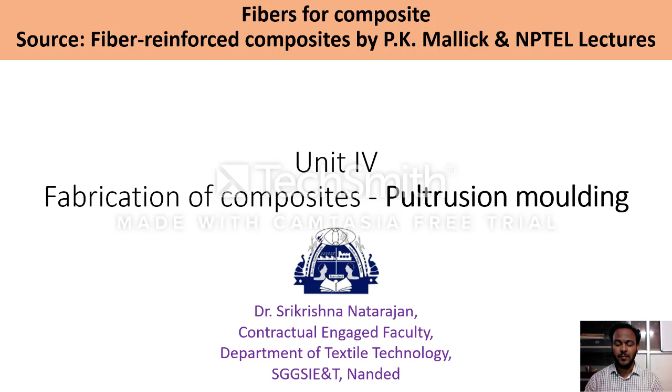We will be continuing with unit 4, which is the fabrication of composites. The topic of today's discussion is pultrusion molding. And before going into pultrusion molding, we will just see a small glimpse of the previous lecture.

In our previous lecture, I have spoken about the blow molding process, the working principle, process parameters involved, advantages and disadvantages, and then applications. Blow molding is a manufacturing process of composites to make hollow plastic parts, in which you will blow the plastic until it occupies the shape of the mold to get the desired shape.

You will use the parison. The first process is the making of a parison. You will make the parison and then fit it in the mold, and then you will start injecting the air with high pressure so that the bottle will get expanded because of the heat and the pressure, and it will occupy the shape of the mold.

There are various process parameters that are involved, like melting temperature, cooling time, etc., and you will make the product. There are some advantages and disadvantages also associated with this process. It's a simple process which involves less tooling cost, and it is used for making hollow parts especially. But there are some disadvantages also with this process. You cannot make lengthy parts or thick parts.

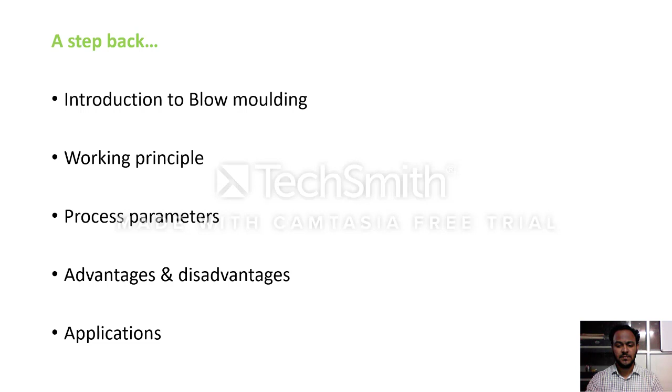Coming to the introduction on pultrusion molding, pultrusion molding was developed around 1950 for making fishing rods of glass fiber reinforced polymer. This is basically the historical perspective of how the process first came into being. It was developed around 1950 for making fishing rods.

Pultrusion is an automated continuous molding process for producing long straight structural members of constant or uniform cross-sectional area. If you want to produce long straight structural members, then the only molding process that you can use is pultrusion molding. The major constituent in a pultruded product is longitudinally oriented continuous strand rovings.

When it comes to the manufacture of composites, the broad principle is you will use a fiber and you will use a matrix, and mixing both will lead to the formation of a composite. Fiber is the reinforcement phase and matrix is the bulk phase, which is used for giving support to the fibers. So here the major constituent in the pultruded product is the longitudinally oriented continuous strand rovings. So that is the reinforcement phase.

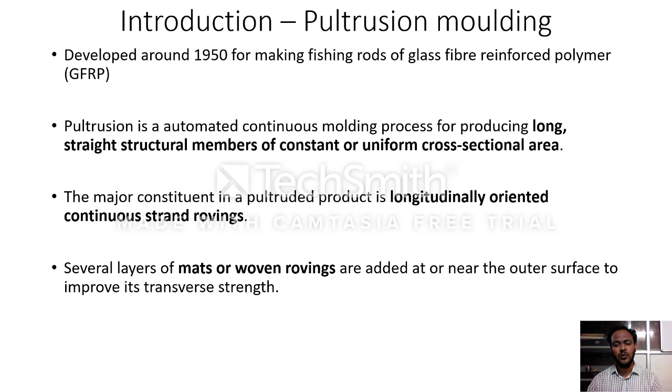Several layers of mats or woven rovings are added near the outer surface to improve its transverse strength. You need not use only rovings; you can use mats or woven rovings also for this pultrusion molding process, which we will see.

What is the working principle of this process? The name itself implies it: pultrusion combines the words pull and extrusion. If you exclude the word pull, then it is only the extrusion process. Extrusion is like the normal melt spinning process which you have learned in polyester manufacturing.

If you remember, in polyester manufacturing, you take the pellets of the polymer and heat them in an extruder, like a screw extruder, which will start pushing the polymer melt. Because of the heat the pellets get melted and are pushed towards the exit of the die, and when the melt exits the die, you get the filaments. But when it comes to the pultrusion process, it is the opposite of that, which we will see.

So pultrusion is the pulling of materials such as fiberglass and resin through a shaped and heated die. The basic mechanism of a pultrusion system is the same as that of the metal extrusion process, but there is a difference. The only difference is that in the extrusion process, the material is pushed through the die.

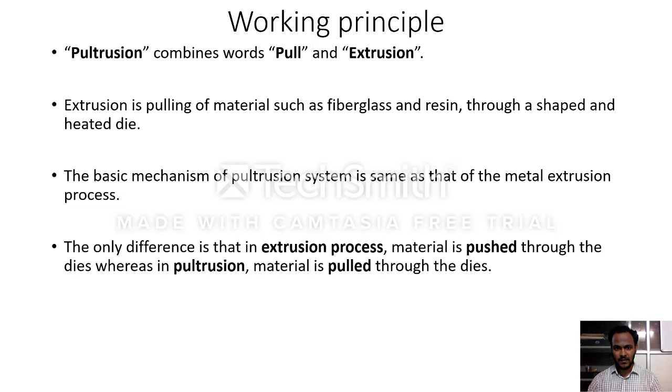What are the raw materials used for this process? The raw materials, when it comes to the reinforcement phase, you see the reinforcement type here is E-glass, S-glass, carbon fibers or graphite fibers also you can use, aramid fibers you can use, and the material form, you can use materials in the form of a roving, mat or in the fabric form. But all should be in a continuous form and not in the short fiber form.

And what about the matrix? The matrix that is used is polyesters, phenolics, vinyl esters, and then epoxy resins. When you see all these matrices, you can understand one thing. All these matrices belong to the thermosetting polymers. Since we need to produce a rigid type of product from this process, we are using thermosetting plastics or the thermosetting matrix.

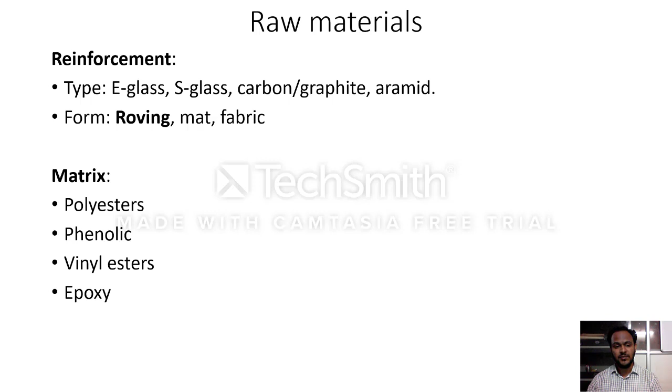Now coming down to the process, before going into the process, we will first see what are the steps that are followed during the pultrusion molding process. First step is the reinforcement handling system, which is the creel. Reinforcement handling system is nothing but the fiber handling system. That is the material which is in the form of a reinforced phase. Next step is the resin impregnation station, where the matrix is present.

Third one is the material forming area, where the product is formed. And fourth one is the components that heat and consolidate. Once you have made the material, you have to heat and consolidate the material. That is the fourth step. And fifth step is you have to pull the pultruded product. As the name itself implies, pultrusion. So you are going to pull the product instead of pushing it, which you do in the extrusion process. And equipment to cut the pultruded product, which is the culmination of the process, where you will cut the product to the required size.

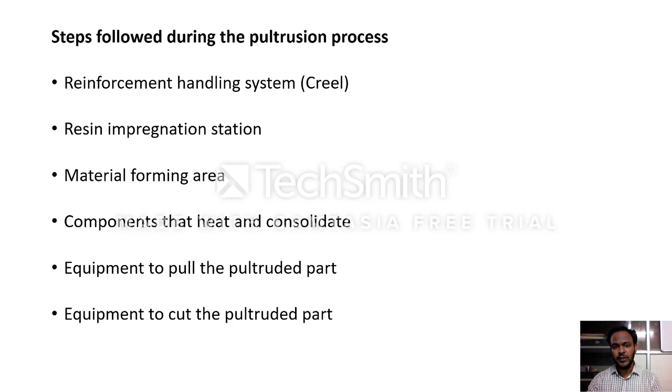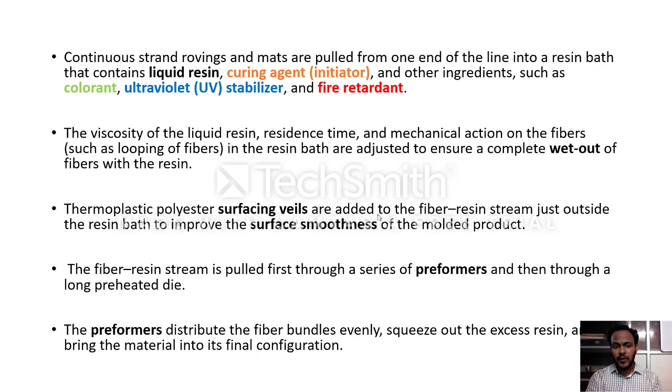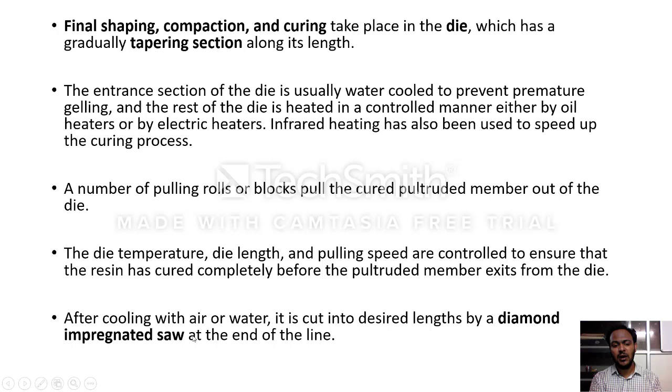So here you can see the pulling system, which is the caterpillar pullers or reciprocating pullers. A number of pulling rolls or blocks pull the cured pultruded member out of the die. This we have already seen. After cooling with air or water, it is cut into desired lengths by a diamond impregnated saw at the end of the line. This is the diamond impregnated cutoff saw, which will cut the composite. That is the final profile or the final product that is made. This pulling system will pull the product.

This is the line diagram which you can see. There are the creels. From the creels, through the guide plate, it moves to the resin bath, and there is a surfacing veil and preformers. These are a series of preformers, and this is the forming and curing chamber. Then these are the pull blocks, like caterpillar or reciprocating blocks. Then finally you have the cutoff saw. This is the line diagram.

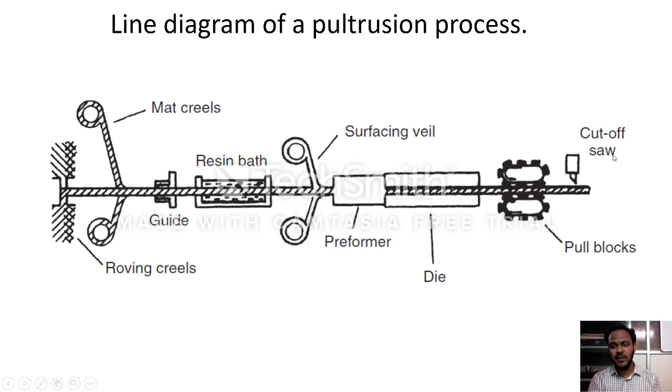Now I will show you a small video in which you can very clearly understand how the process happens exactly. This video is from Strongwell.

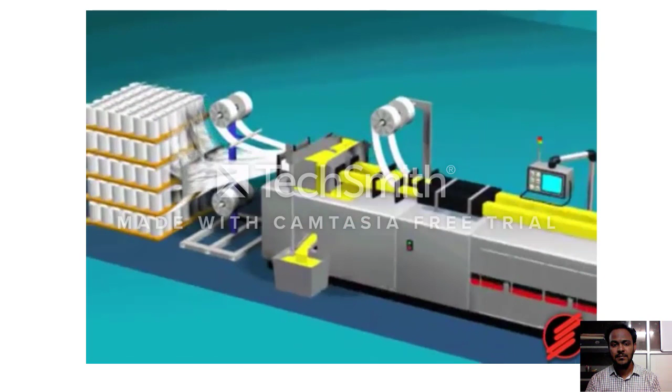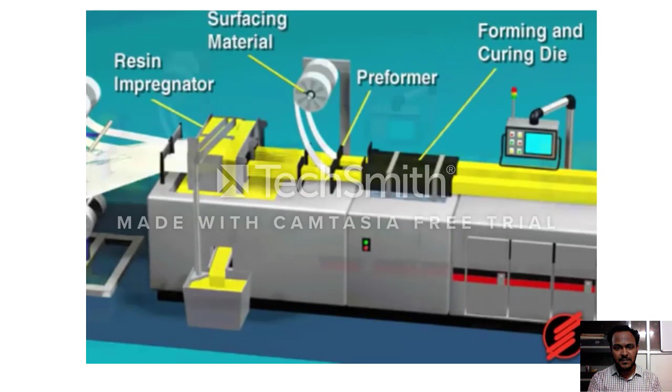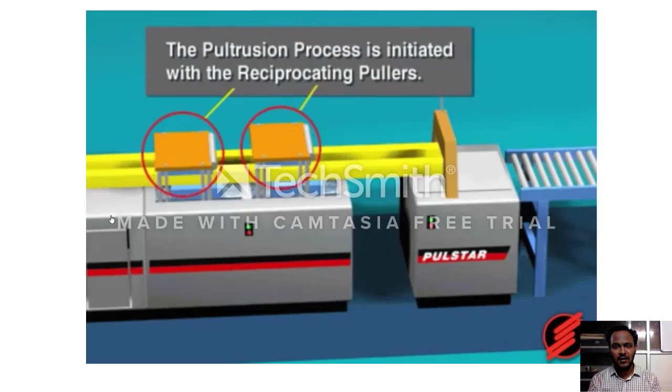You can see this is the place where the fiberglass rovings are there. So the continuous stranded mats to the resin impregnator, surfacing material, preformer, these are the reciprocating type of a pulling system, cutoff saw. Here the pultrusion process is initiated with the pullers, reciprocating pullers.

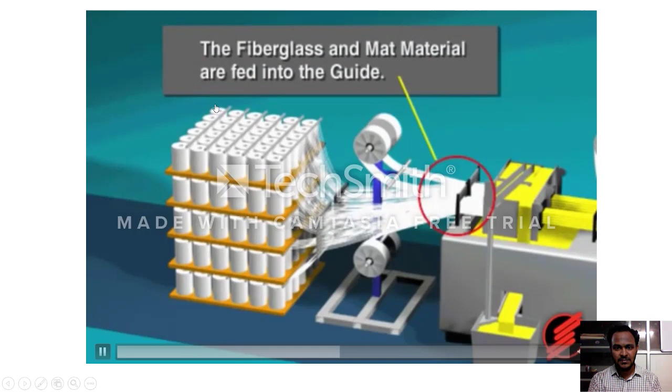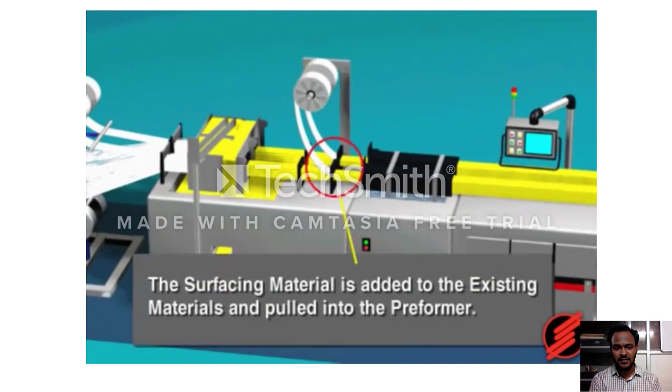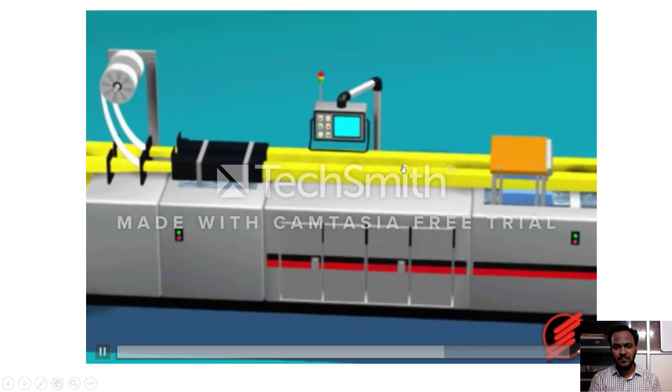This is how the strand mats are fed here. Then here the impregnation takes place with the resin tank, and the surfacing material is added to the existing materials, and then it is pulled into a preformer, and this is the curing chamber. And here this one we have already seen the reciprocator,

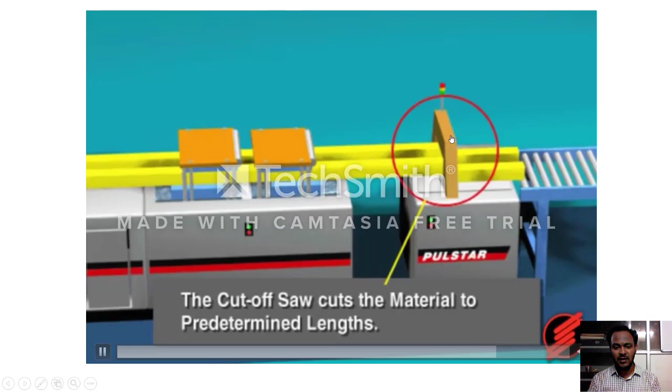and this is the cutting saw, which is a diamond cutting saw to cut the product into predetermined lengths. You can see how it is cut finally. So coming down to the further discussion, we will see what are the advantages and disadvantages.

This is a low cost automated system where human involvement is least, which produces high quality products. So it is a low cost automated system where the human involvement is very least. Once the rovings are kept and the program is fed, then it will automatically keep running. Near net shape can be produced. So this is one of the great advantages in this pultrusion molding process where the near net shape is produced.

I hope you all may be remembering this word called near net shape, which I have already taught you during the class in the advantages of composites. You can go through that. Near net shape means the exact shape whichever is required that you can make it. So whatever fibers or matrices that you have added for manufacturing this pultruded member, that will get almost utilized for making the final product. So you will get the exact shape that is expected.

Next advantage is the surface finish of the product is high as compared to the other composite processing methods. The surface finishing is very good in this process. Can fabricate extremely large parts and any transportable lengthy parts. The production rate is high as it is a continuous production process. If you want to make large and lengthy parts, that may not be possible with blow molding or hand layup molding, which you have learned previously, but it is mainly possible in the pultrusion molding. So that is a great advantage, and the production rate is very high as it is a continuous production process.

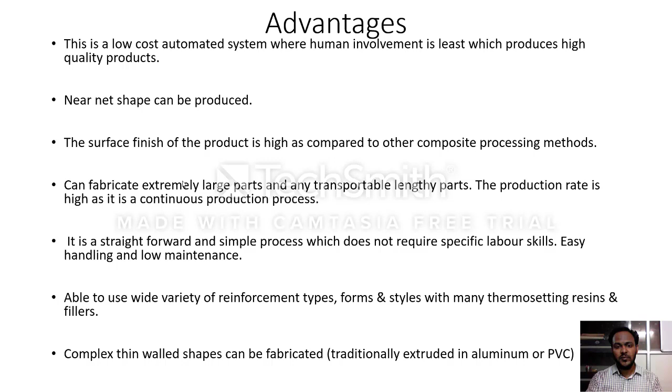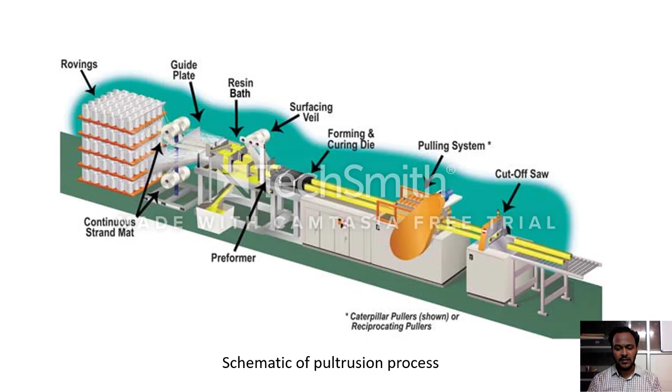Parts are resin rich to account for fiber anomalies, so strength is sacrificed. This is another drawback. See, for example, you know very well that when the fiber volume fraction is higher, you will be getting good mechanical properties. But if you keep the matrix volume fraction very high, where the amount of matrix present is very high when compared to the fibers, in that case what will happen?

The strength will get affected, because in all the composites you may not require high strength. There are composites where you may require the bulk. In that case, the strength will be affected. Already in the curing chamber you do a rapid curing or a fast curing. So along with that, if you use a resin rich composite, strength will get affected.

And another disadvantage is voids may result in parts if excessive opening is given at the die entrance. See, this is related to the previous problem. In the previous problem, resin or fibers get accumulated at the die entrance, that is, once it passes the roving stand, passes to the resin tank, absorbs the resin, and then moves to the preformer to get some initial shape in a series of preformers, and it moves to the die entrance. If it goes with the accumulation of fibers, then it creates a problem.

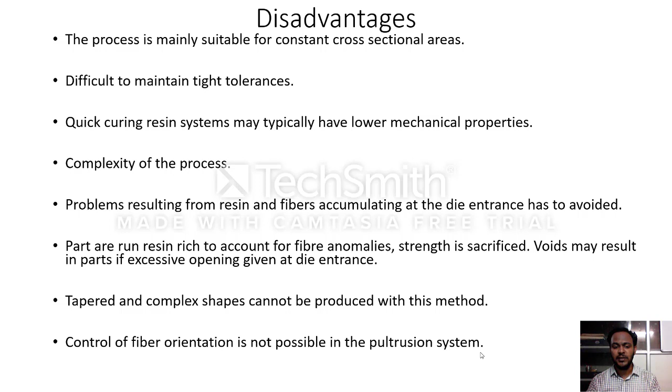Another disadvantage is tapered and complex shapes cannot be produced with this method. So tapered or complex shapes are not possible, only uniform constant cross sections can be produced. And another disadvantage is control of fiber orientation is not possible in the pultrusion system. You cannot have control on the fiber orientation.

Coming down to applications, what are the products that can be produced from this pultrusion molding process? Products like solid rods, tubing, and long flat sheets are easily fabricated with the pultrusion process. Simple and constant cross-sectional structural sections such as channels, angled and flanged beams can be produced by the pultrusion process. Tool handles for high voltage work, when you operate electrical things, can be made by this pultrusion molding process.

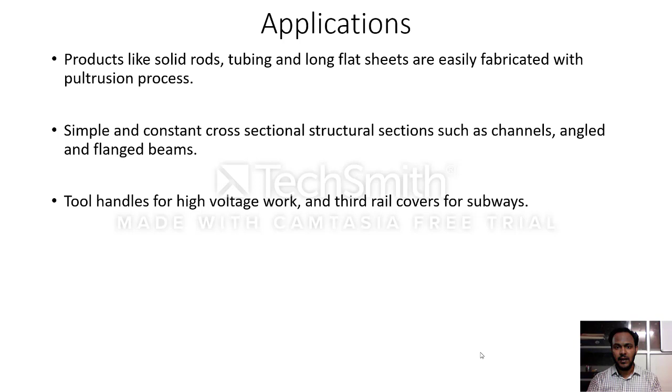And third rail covers for subways, the lengthy third rail covers used in subways, are made by the pultrusion molding process. So here we have come to the end of the lecture. This pultrusion molding process is used mainly for making long, constant cross section type products. So that's all about the pultrusion molding process.

In our next lecture we will see another process of manufacturing of composites. So thanks for listening.